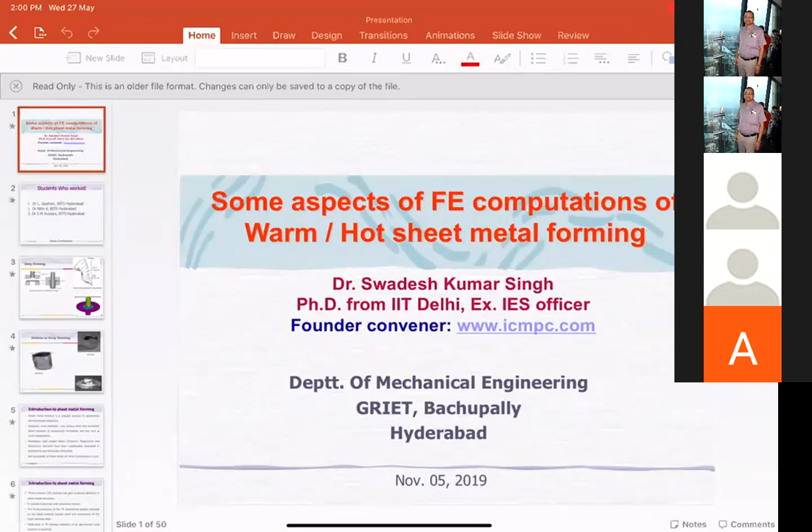Just a minute. So everybody is able to see the screen? Yes, sir. Yes, yes.

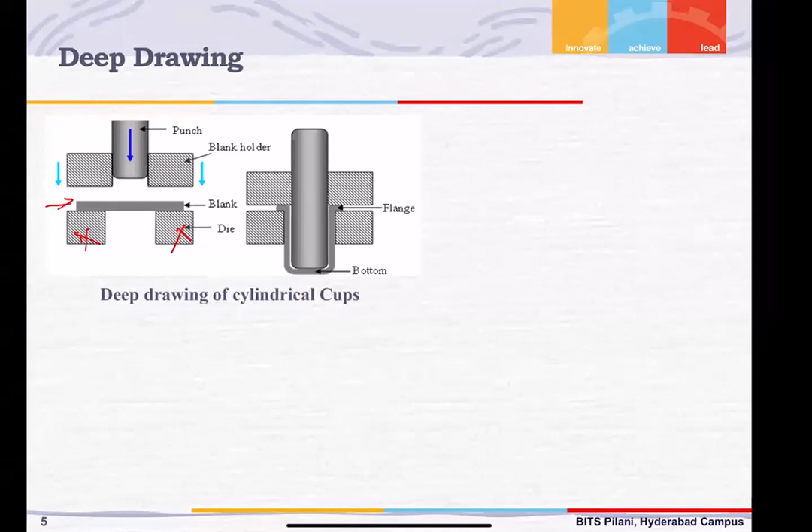So for deep drawing, here we can see the dies, and the sheet metal blank is kept over the die. We apply blank holding pressure. Why do we apply this blank holding pressure? Generally, this blank holding pressure is approximately 2% of the yield strength of the work material.

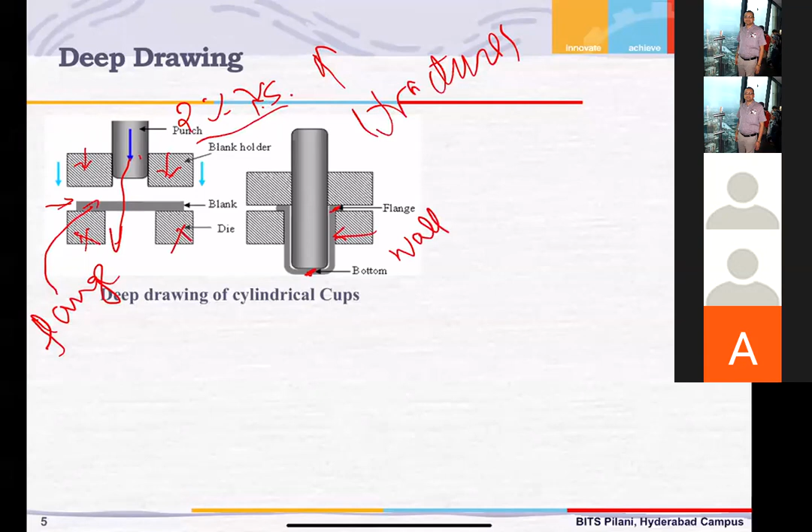So when the punch comes in, the sheet will come in the form of a cup. The technical term for this is cup bottom, this is the flange, and this particular part is called the cup wall. There are different regions in the deep drawn component.

Now if you see the cross section of the drawn cup, if you cut it, these are the stress patterns. This figure I have taken from Dieter, a very beautiful book. All teachers must study this book, Mechanical Metallurgy by G.E. Dieter, especially the metal forming part, metallurgy part, very beautiful book.

In the flange region, there are compressive hoop stresses and radial tensile stresses. In the wall region, there is uniaxial stretching. At the cup bottom, technically speaking, there is no significant stress pattern, but very insignificant biaxial tension will be there.

Most of the load the material experiences is in this region, the punch corner region. So because of excessive load, there will be a neck formed in that region.

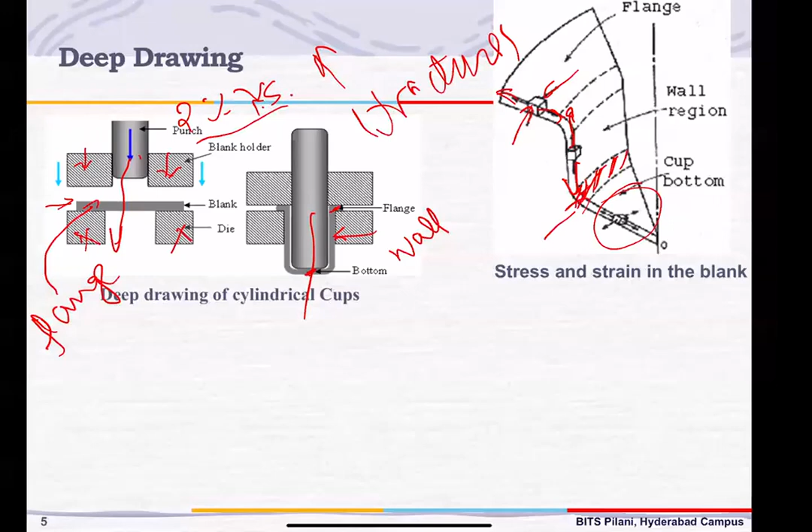So this is basically discretization using LS-DYNA. We have a lot of dedicated facilities at GRIET, very state-of-the-art machines, especially for metal forming. We have simulation software, we have a scanning electron microscope, so if you need any help please let us know.

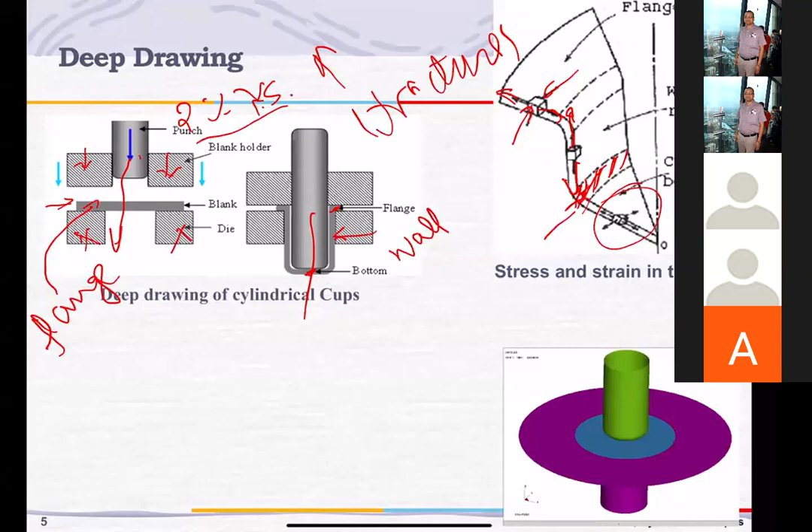So we have LS-DYNA, and we have 2 cores. What is the meaning of that? We use the preprocessor Dynaform, which is tailor-made for sheet metal forming operations. By giving boundary conditions, especially the characterization of material you have done, putting all the parameters into the preprocessor, then you run the program. When you run the program, there is a solver doing the calculation in the background.

So 2 cores means there are 2 licenses of LS-DYNA, so that computation time will be approximately one half. When you are doing actual computation, it will take days together.

In this presentation I will tell you that when you are artificially scaling up the deformation speed, the predicted values are not correct, I will show you here. So we should try to run the simulation in as exact conditions as possible, and for that you require multiple cores.

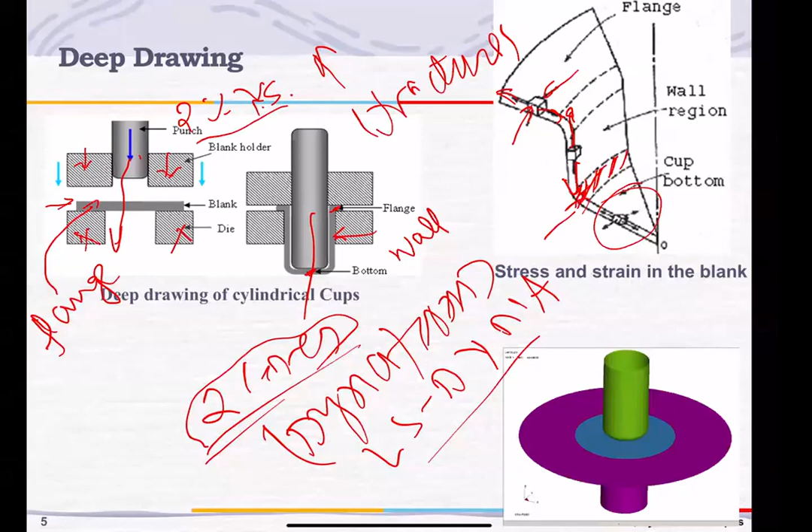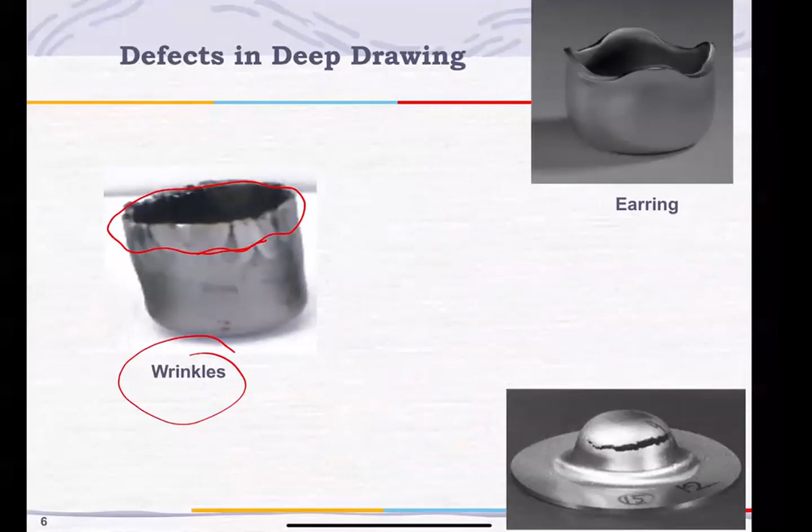See, these are some of the defects I was telling you about. These are wrinkles. These wrinkles will appear because the blank holding pressure is not sufficient.

Now, there is earring. Professor Mishra was also speaking about earring. The earring we cannot avoid because it appears due to the delta R value of anisotropy: R0 minus twice R45 plus R90, divided by 2, delta R. When there is a larger value of delta R, this ear height will be more.

Once again, for this July edition of FDP on material modeling, I would like to pull basically either Professor Yoon or Professor Barlat, because they are expert in this, especially Yoon, because there is a Yoon model for this particular earring height and earring prediction. So I will try to request them to give one presentation on this material model in July.

But there are schemes that you can minimize this earring height. Otherwise, after deep drawing, what we have to do? We have to cut off the ears and get the final product, and unnecessarily we are adding another process in between. So this can be minimized. And then...

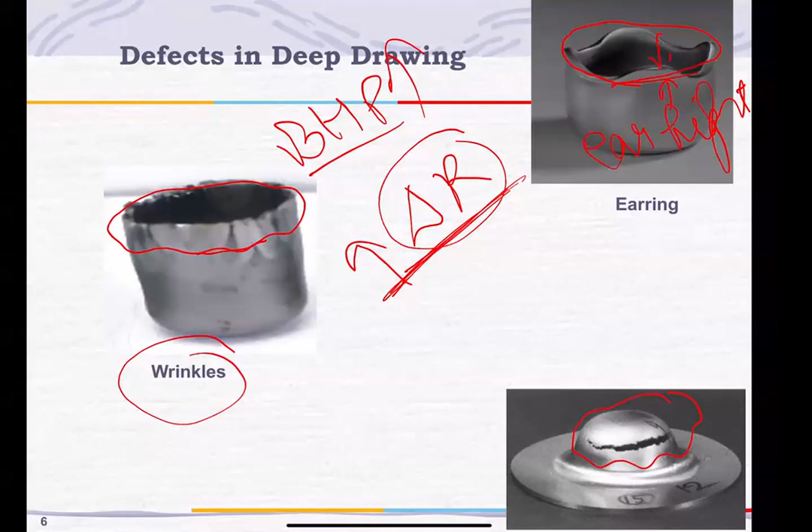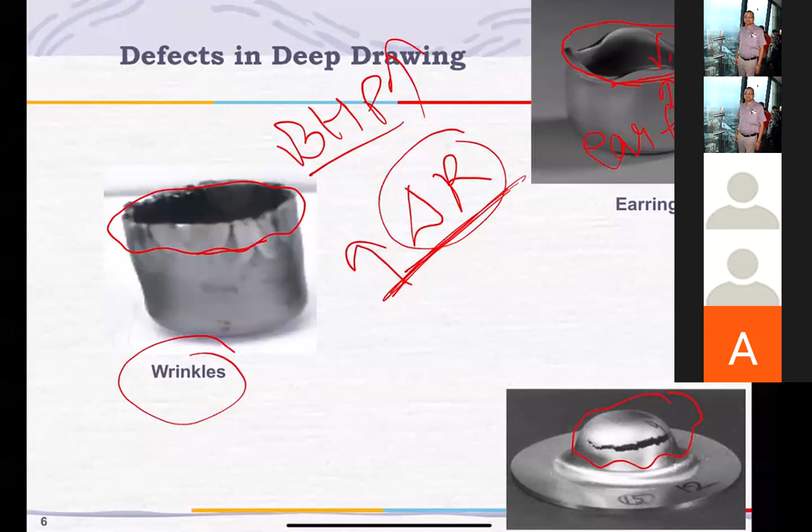Another very popular defect is fracture at the cup bottom. This appears when either the draw ratio exceeds the limiting draw ratio, or when the blank holding pressure is high. Because of these two reasons, fracture appears in the drawn component. Of course, there are other defects also, for example stretcher strains, orange peel, and 6-7 other defects, but we are discussing only the main defects.

So introduction, what is it? Basically, sheet metal forming is a popular process in automobile and aerospace industries. Whatever automobile product you see - somebody told me, those who are working in the automobile sector, that approximately 25 to 30% of the engine products are sheet metal formed products. So it's quite extensively used in not only automobile but nuclear industries, wherever there is a fuel bundle and all that, it's all sheet metal forming operation.

So some of the popularly used materials are low carbon steel, generally, for example for car bodies. If it's a low end car, the material is interstitial free steel or DQ steel. Austenitic stainless steel is also used extensively. But if it is a high-end car, sometimes we use titanium to make the car body light, sometimes in high-end cars. Also titanium and magnesium.

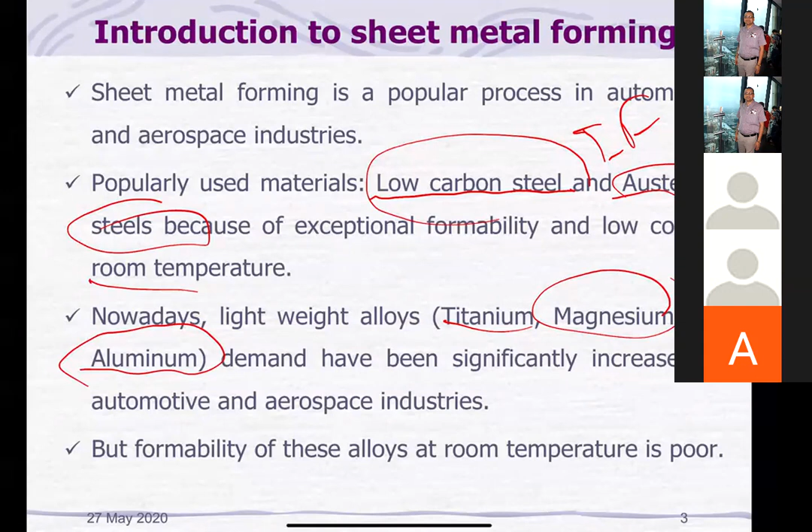Our friend Professor Manoj Gupta also spoke extensively, it was a very beautiful lecture by him. Aluminium - generally whenever it comes to aluminium, we use duralumin. But the problem with aluminium is it has got very poor formability. It is very difficult to form aluminium, even the duralumin. But this titanium also, we are going to discuss.

I'm going to discuss 2 case studies today. One is ASS, and another one is titanium. So there I'm going to discuss these things.

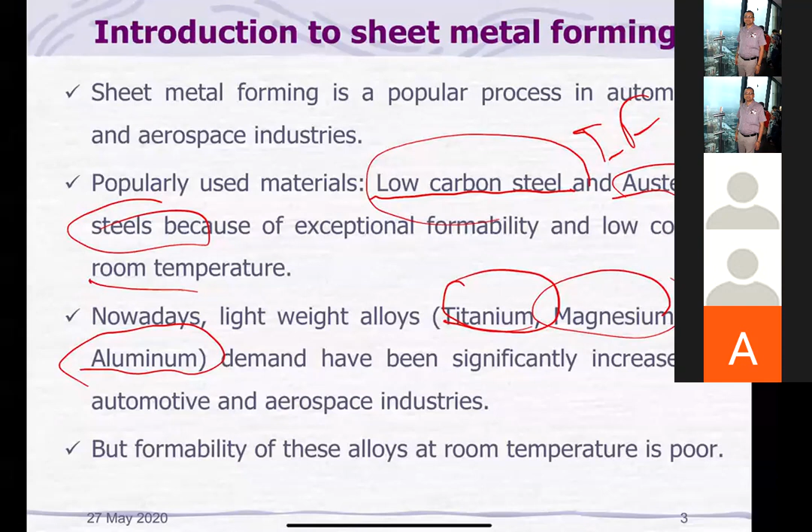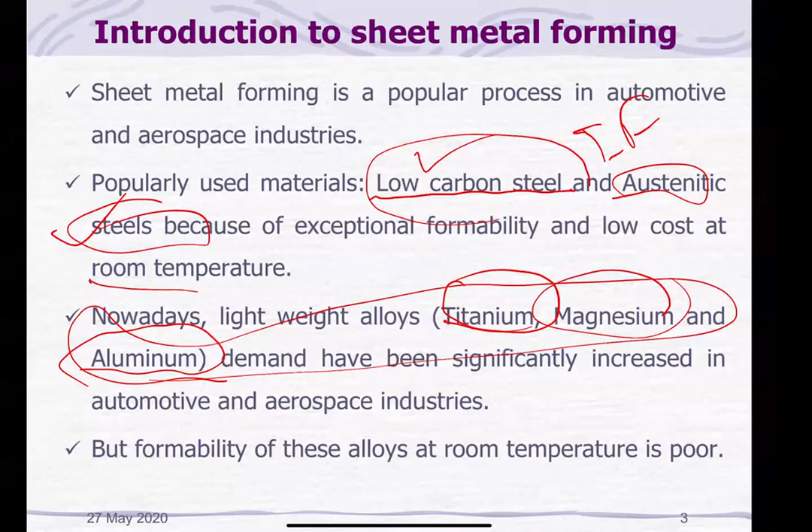So except low carbon steel, and up to some extent austenitic stainless steel, these materials have got very poor formability. All these materials like titanium, magnesium - as Professor Gupta was telling, there is a material AZ31, so it has got some good formability, but nothing close to low carbon steel and ASS. ASS is known to have very good formability.

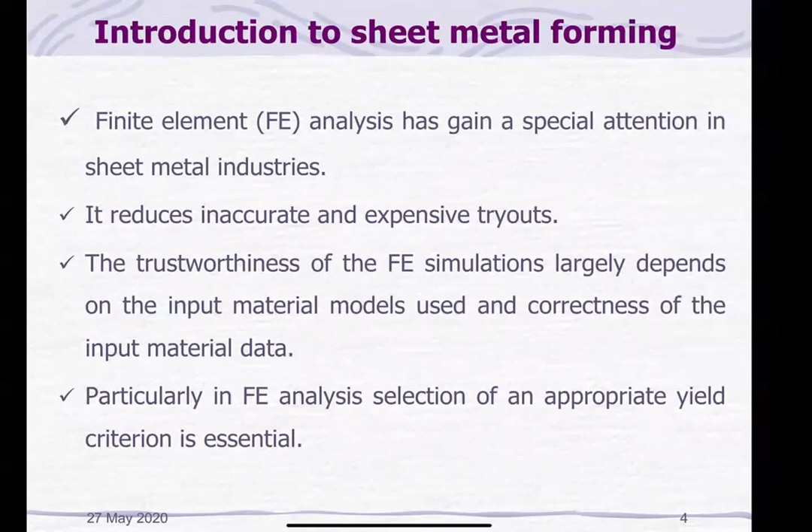Then the problem is whenever you think of any new component, new design, you have to form it. You cannot go for multiple hit and trials. Especially we have got titanium, already it is a very poorly formable material, so we cannot go for multiple hit and trials. So we have to depend upon finite element computations.

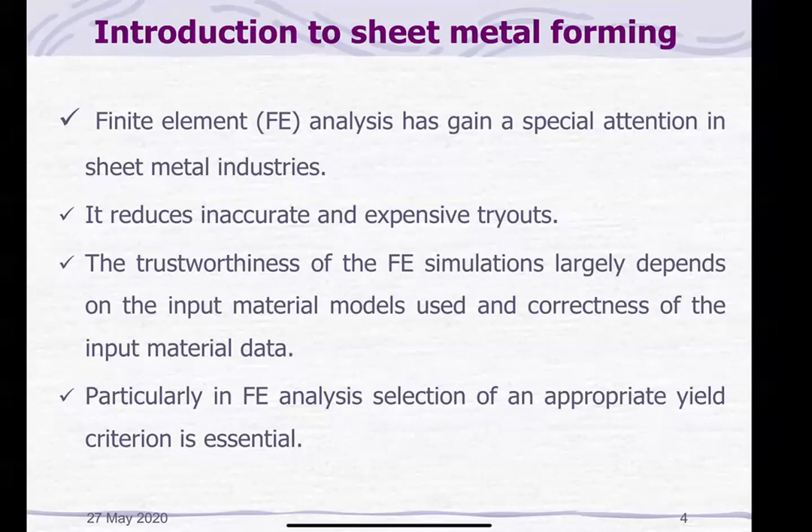And what I have listed are some of the advantages of finite element computation. I think all of us are teachers, so all of us know these things very well.

Then finite element simulations of warm forming involve highly nonlinear yielding and flow behavior. What is the problem? When you are forming the material at room temperature, the number of parameters in evaluating it are quite limited. For example, when you are thinking of room temperature, what are the parameters that you have to give to any simulation? Yield strength, and then...

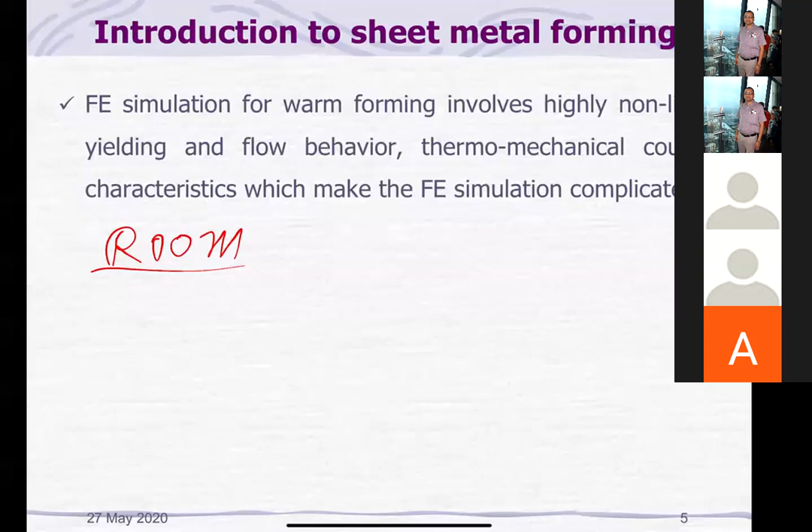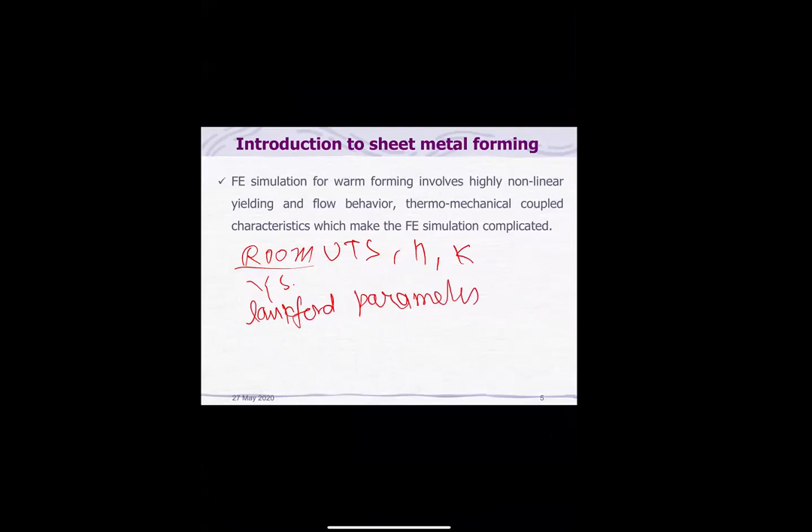Ultimate tensile strength, work hardening exponent and strength coefficient K, and then Langford parameters - R0, R45, R90. Actually, Nitin was also telling that for biaxial parameters are also used for simulation for some special materials. But these parameters are minimum. For example, either you follow Hill or Barlat. Barlat has 3 models - Barlat 2000, Yoshida Barlat - there are 3 models that people use nowadays. So these parameters we have to calculate.

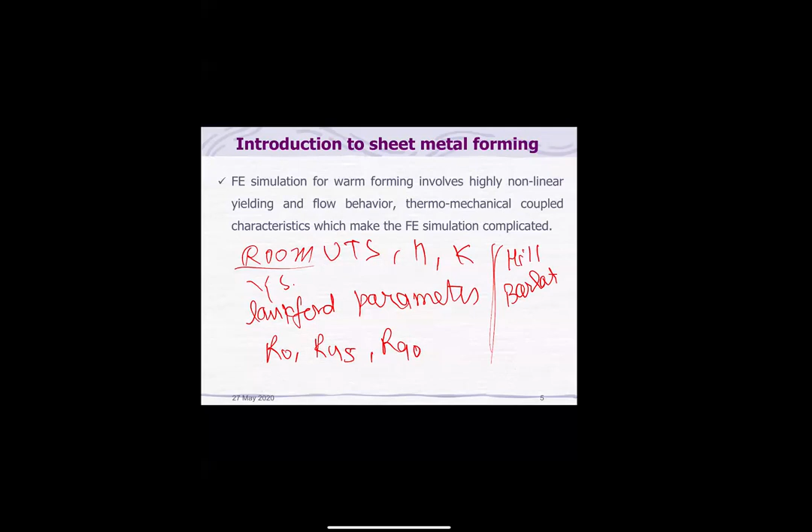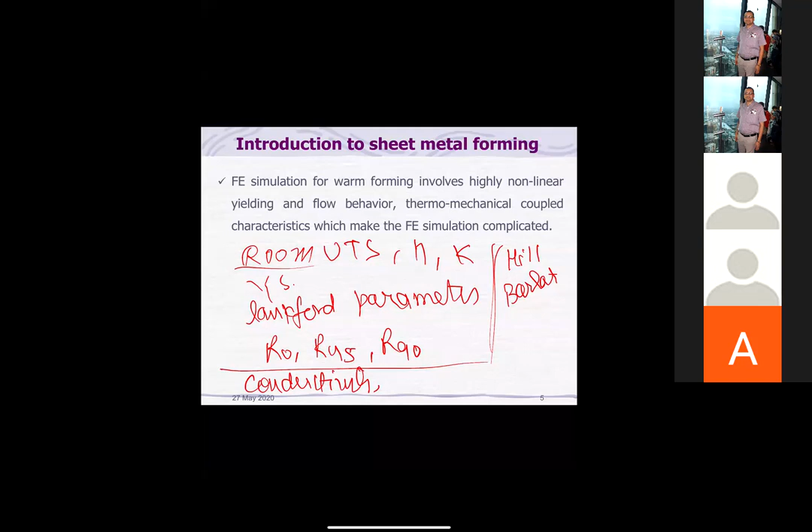But if it is warm forming, some additional parameters come into picture, for example conductivity of both the workpiece and the tooling, and the parameters that are required at high temperature. All these parameters have to be known. So certain discussions I will be doing related to that.

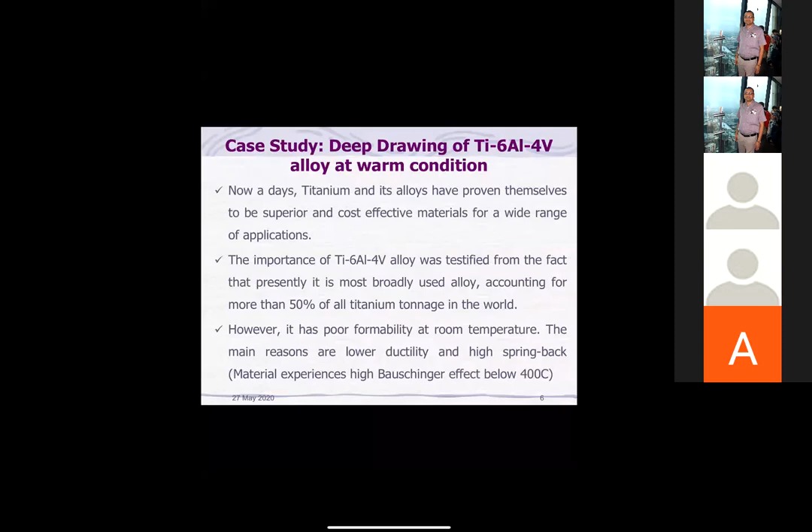So as I told you, there are 2 case studies I'm going to discuss. First is titanium grade 5 - titanium with 6% aluminum and 4% vanadium. This is also called grade 5 material.

Dr. Bhattacharya was telling us, in a very informative session, that this material is the most popular material in the titanium category.

One of the materials his team developed themselves is the beta 21 alloy. They developed this material for defense applications in India, and we are jointly working on a project with Dr. Amit Bhattacharya to test the formability of this beta 21 material.

We should know that titanium grade 5, 6Al4V, is a two-phase material, alpha and beta, one BCC and the other HCP. HCP is generally brittle in nature, while BCC is strong. As far as formability is concerned, the best crystal structure we look for is FCC, because FCC has the highest ductility. The reason is simple: it relates to the slip system.

So while preparing this material for all of you, I thought that if you see the presentation slides of Professor Sushil Mishra, Nitin, Dr. Amit Bhattacharya, and mine, you will get the overall picture of what is happening with formability.

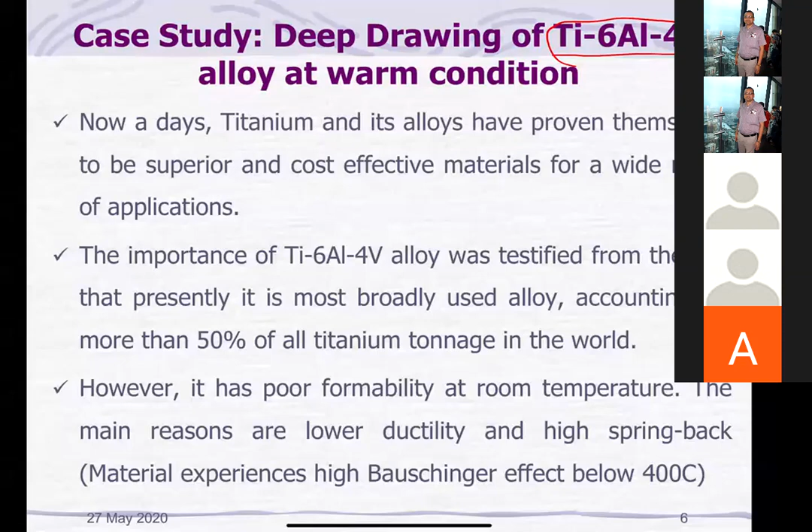Titanium is a very important material, with a lot of defense applications. Without titanium, it is impossible to do anything.

As I told you some time back, to study formability, not only experimentation but also simulation support is needed. And simulation will run properly only when the material properties are given to the system very properly.

As a side point, I'd like to tell you something personal. Most of you know we are organizers of this ICMPC conference, and the next conference will be at IIT Indore. Professor Khalsa and some people from NIT Bhopal, and friends from IIT Kharagpur, are the organizers. We receive close to 1,000 papers every year for this conference, and approximately 60% are accepted for presentation and publication.

What I've noticed is that most authors writing papers on modeling and finite element computation don't give any material properties—what properties they used in the system. They just give some colorful images with no discussion, just observation. Kindly don't do that.

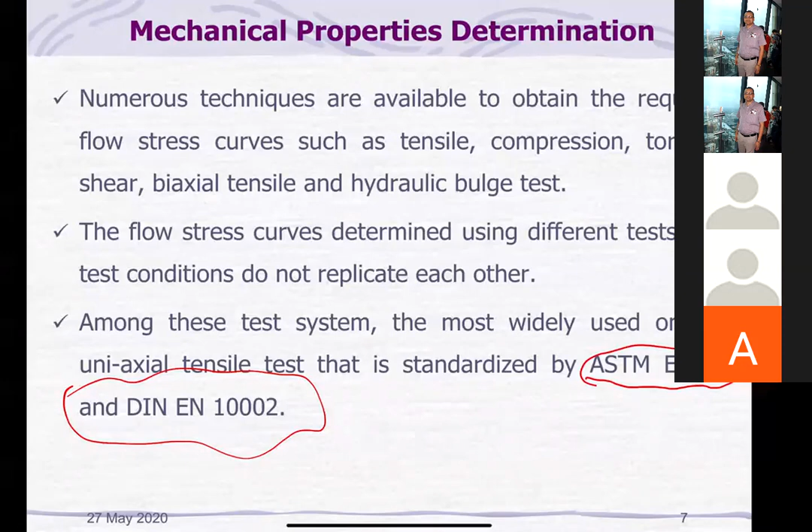How exactly do we calculate the properties? We have many systems, mostly through collaboration with BITS Pilani Hyderabad campus, with Dr. Nitin, Dr. Suresh, and Dr. Gupta. In our group we have a lot of machines.

Presently we have the capacity to perform tensile tests at constant crosshead speed and also at constant strain rate, ranging from 0.0001 per second to even 100 per second. This is the range in which our machine can operate, capable of tests at both constant crosshead speed and constant strain rate.

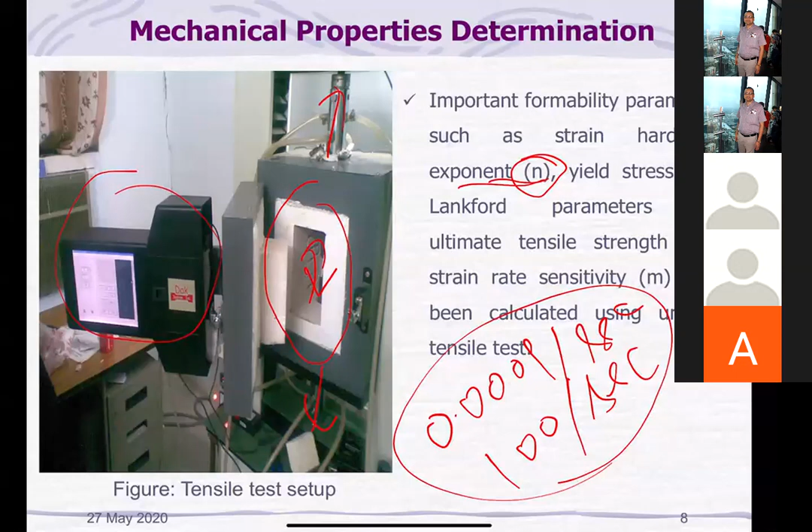So all mechanical properties have to be calculated, especially N, which is very important for studying forming behavior. It plays a crucial role, since there's an objective question that appears in various competitive examinations: the formability of the material depends upon...

It's quite a confusing question.

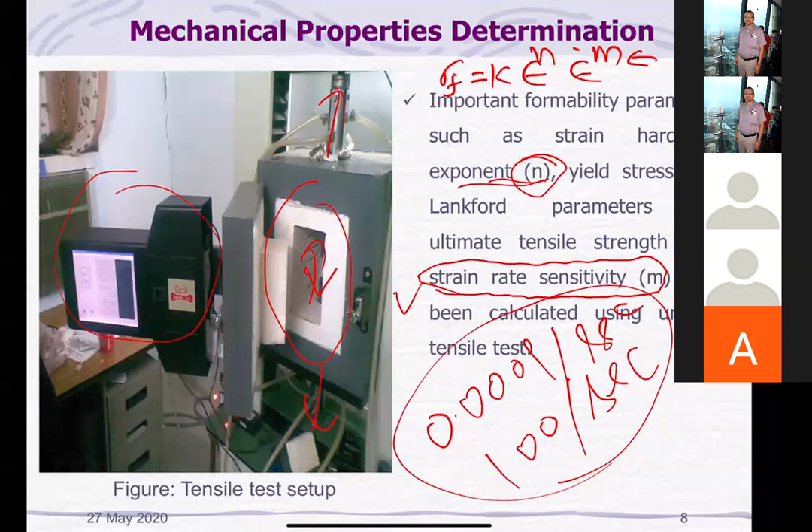Of course, formability depends upon many factors, but the most important factor is the work hardening exponent N, because it will suppress the formation of neck in the punch corner region. And because you are forming at elevated temperature, strain rate sensitivity index M also plays a very important role. If you see the complete flow curve equation in its basic form, it is sigma F equals K epsilon raised to power N, epsilon dot raised to power M. We are talking about this M, sensitivity index. So these things are very, very important.

This is the BISS system we are talking about. This facility is there at GRIT. This system is meant not only for testing the formability of the material, but also to carry out the tensile test. There is a chiller here, and a controller connected to a computer. Inside the furnace, we are keeping the specimen. This facility can go up to 900 degrees centigrade.

So certain things we should understand. For research work, anything and everything cannot be used. For example, most of our private colleges have a quite cheap UTM, not even 2-3 lakh rupees, you will get that UTM machine. A result from that UTM cannot be considered as an input to any research paper. You know why? The machine should be quite accurate.

There are three types of errors in a machine. First is basically the system error. What is system error? Because two products cannot match, it is not possible to duplicate any product exactly, so there will be some variability. We should not worry about the system error, because by calibration the system error can be eliminated. These system errors are also called systematic errors, and they can be eliminated.

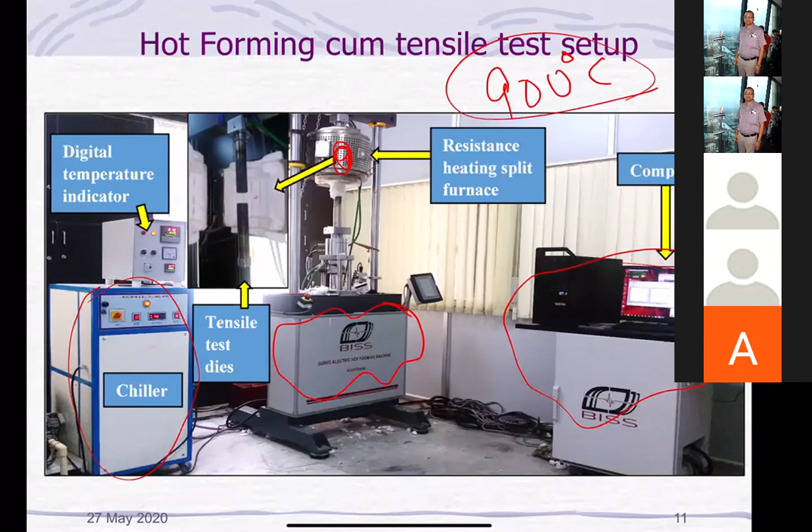But there is another type of error called short period error. This short period error is due to change in the environmental conditions of the machine. For example, suddenly there is a vibration in the machine for a brief period, or a sudden increase in temperature or in the load cell. These errors we cannot avoid. So only machines in which these short period errors are minimized can be considered for any research work.

This BISS system is an Indian system. It's something like Bangalore Instrument, something like that. It's an Indian system, but owned by ITW, same as the Instron people. It's owned by them, but the owner here, the Indian counterpart, is basically Indian, and the company is basically Indian. Most of the workers are Indian, so they are quite accurate. They are competing almost with Instron and Zwick.

DMRL also has got a very big facility, I think close to 1.2 crore, a bigger facility. We have only the 5-ton capacity. I think DMRL people, actually Dr. Raghu, he's someone we respect very much because he also helped us a lot during our initial days of research. They have got, I think, a 1.5 crore BISS system. I think they can go up to 50 ton, and temperature also they can go up to 1200 degrees centigrade. But here we can go only up to 900 degrees centigrade.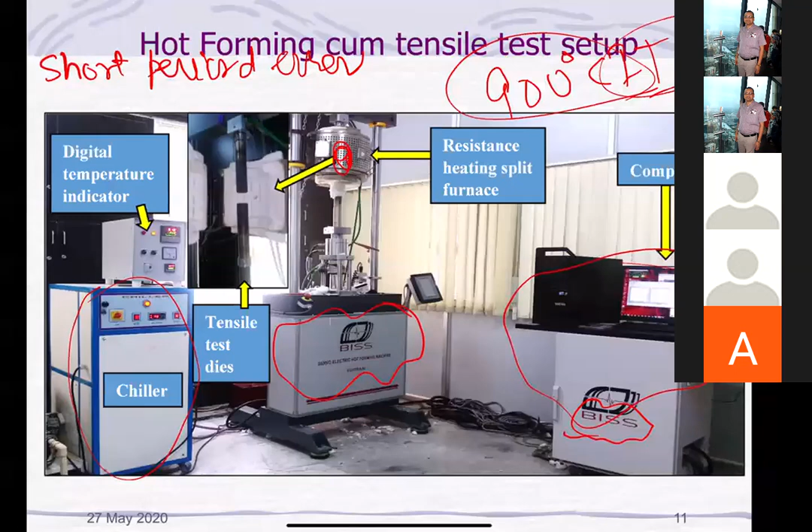Then we are discussing about the titanium. So at 400 degrees centigrade, these are the properties. R value, this is called R0. This is called R45, and this is called R90. We can see here that there is a lot of variability in the material.

See, even the yield strength at 0 degree orientation to the rolling direction - there is almost a difference of 100 MPa at the 45 degree direction. And again back to the square one at 90 degree. So there is huge variability in the yield strength and ultimate tensile strength. We can see this through the Lankford parameters R0, R45, and R90. But in the N value, there is not much significant variation.

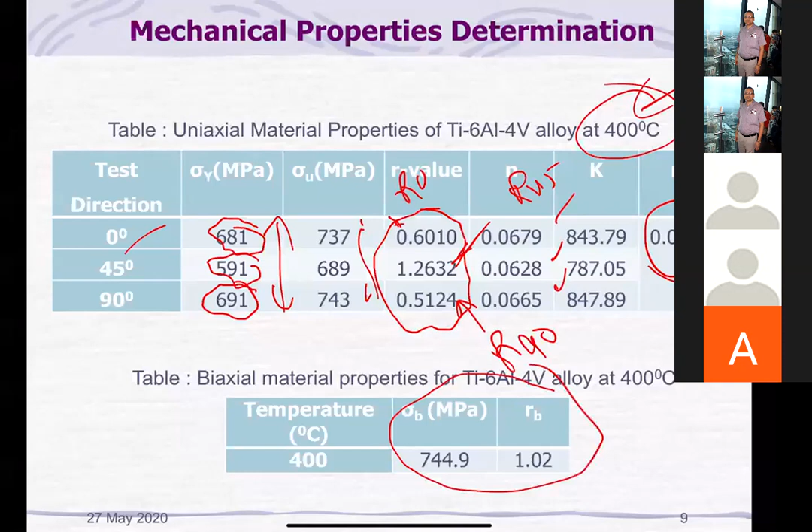M value is also very small, because the temperature is only 400 degrees centigrade. As Dr. Amit Bhattacharya was saying, below 600 degrees centigrade, no microstructural changes are expected in this material. Oxide formation, alpha-beta converting into beta, these changes are not expected below. Even phase changes are not possible below 745 or 800 degrees centigrade. I don't know the exact metallurgy of this titanium; only Dr. Amit knows it very well. And these are basically biaxial parameters for titanium at 400 degrees centigrade.

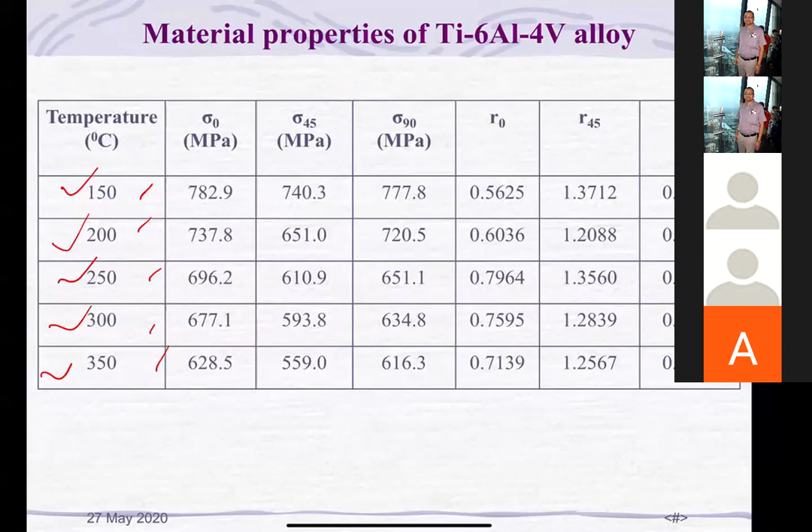To characterize the material fully, we have taken so many temperatures: 150, 200, 250, 300, 350, because students working under us, initially we ask them to fit into some ANN or support vector regression just for initial hands-on, so that they know how the material properties vary with respect to temperature. It's a basic study we ask students to perform, and for these studies we need data. For that we carry out tests at different temperatures, and generally they publish this ANN type of thing in a low impact factor journal. Our main study goes to some good SCI journal, but initially we encourage students to write on their own, and whatever basic study they carry out, they should publish at least in some Scopus journal, because a non-Scopus journal is not worth publishing.

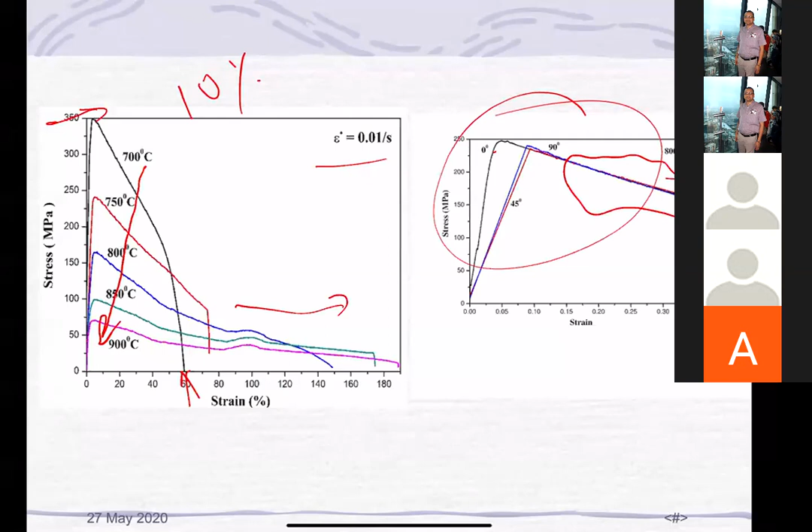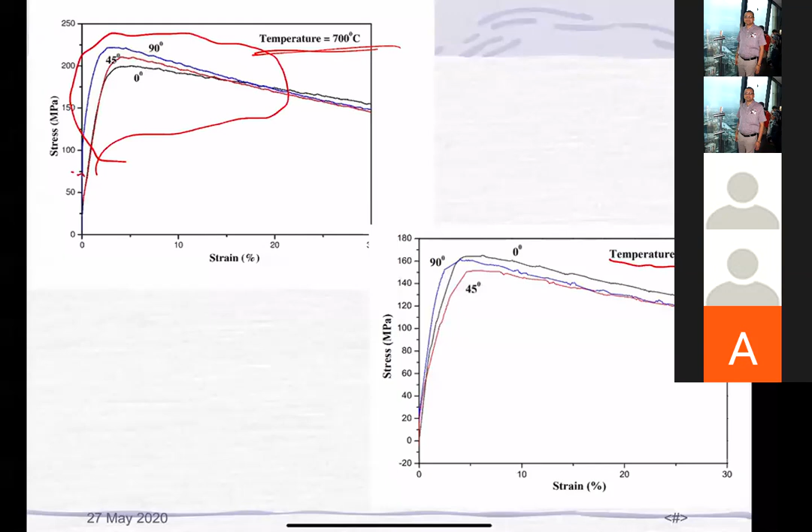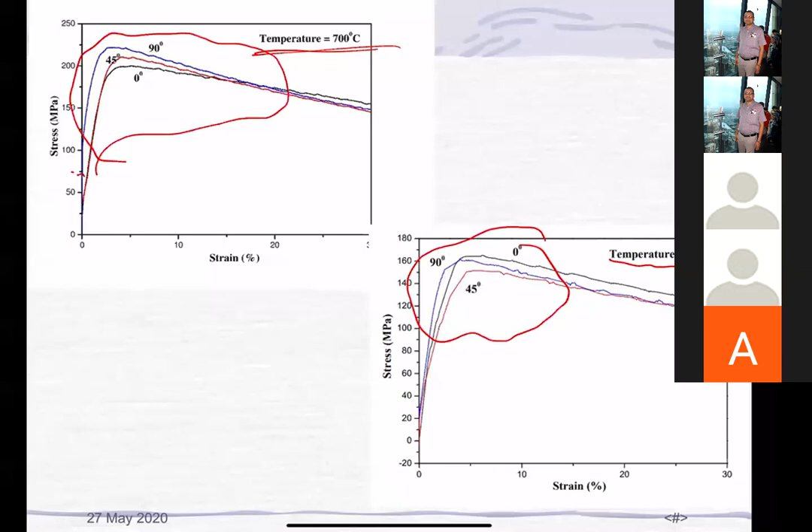Initially I planned some video, but there is no video here. I will try to explain something. Whatever study you are performing, these studies are highly material specific.

For titanium, we have seen how the stress strain diagram follows. If you see at room temperature, and if the temperature increases further, let us say 300 degrees centigrade, the curve will shift like this. But this philosophy we cannot extend to every material. Each and every material has to be investigated thoroughly before doing any research on that.

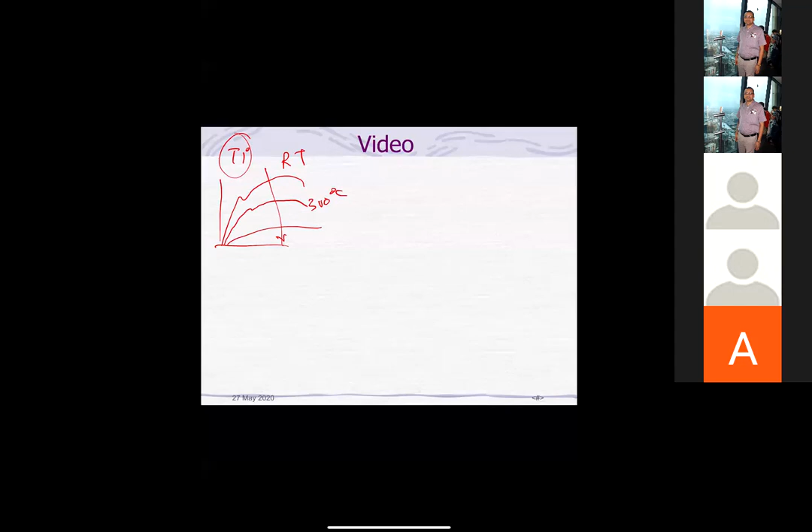For example, austenitic stainless steel, ASS, this is another material I'm going to discuss today. If you see ASS, same stress strain diagram, let us say this is the stress strain diagram at room temperature. Now you increase the temperature to 300 degrees centigrade. We are discussing this for ASS.

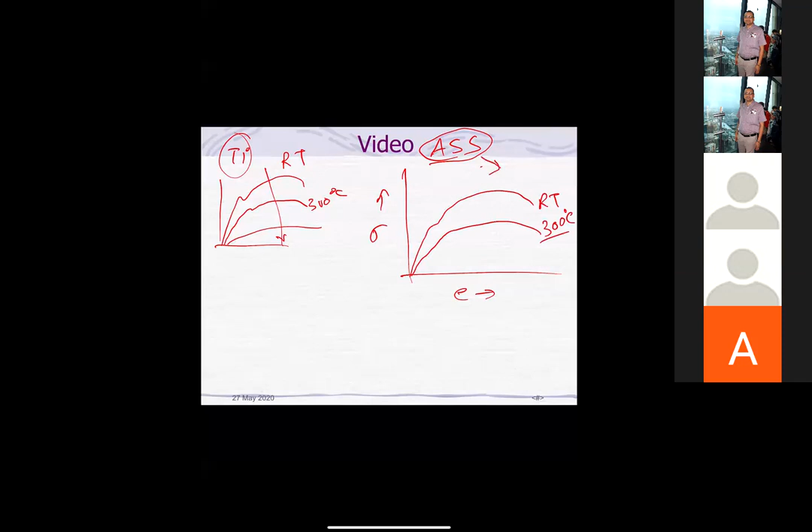But now what happens, due to the presence of chromium, there is a phenomenon called dynamic strain aging, also called the Portevin-Le Chatelier region. In a certain temperature range, the dislocation density of the material increases suddenly. This temperature range depends on the exact composition in the alloy, and it varies from 300 to 650 degrees centigrade. So in this range, what exactly happens, let us say at 450 degrees centigrade.

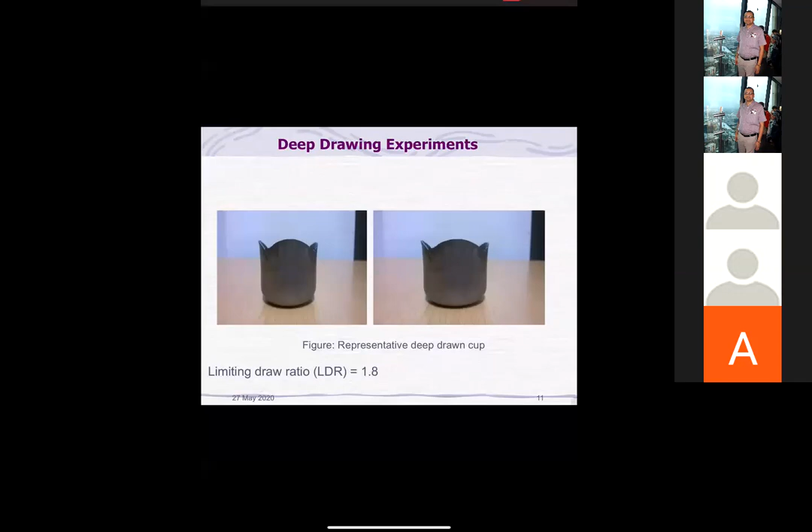If you see what happens inside the material, at a certain temperature, mobility of chromium becomes more than the mobility of dislocation. So the dislocation is moving very peacefully, chromium comes from the back and bangs it, and this divides the dislocation into many parts. Suddenly there will be an increase in the dislocation density. So what will happen? This temperature curve will be even beyond the room temperature curve. But when we go beyond 650, again the curve will go down. Let us say, this is the 900 degree curve.

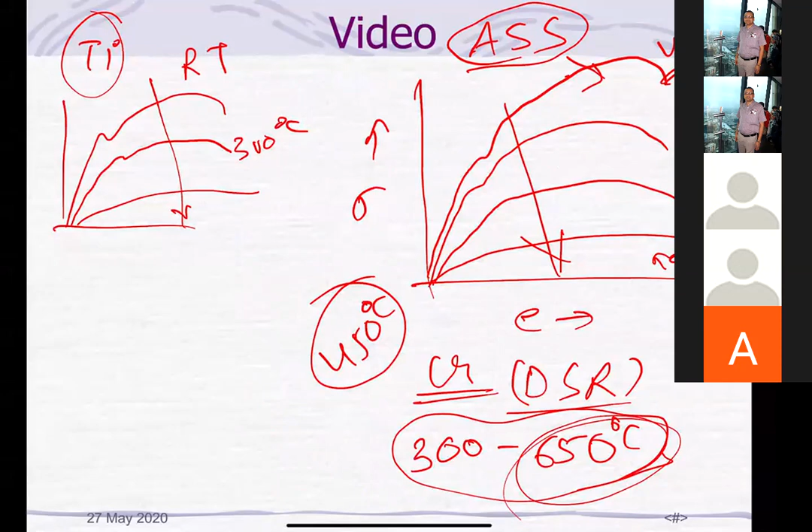So the idea being explained here is all the material looks similar. For example, researchers sometimes ask if they can take data from the literature, even though apparently the composition looks the same. But microscopically, the composition will not be same, there will be some variation. So we should do the characterization separately, because a slight change in composition will affect the properties altogether.

Now see, these are induction coils to heat the die, because the problem is that even when you heat the workpiece, if you keep it on the cold die, it will again experience thermal shock. So that should not happen. The workpiece we keep here, and the punch deforms the material, and the deep drawn component comes out from this side. This is another induction furnace, where we keep the work, heat it, and shift it over the die.

Dies are already hot, and we measure the temperature using a pyrometer. Nowadays pyrometers are quite popular for checking temperature. During this coronavirus time, everywhere they are using thermal scanning, meaning they are measuring temperature. We have so many such temperature measuring systems to measure the temperature of these workpieces in the die.

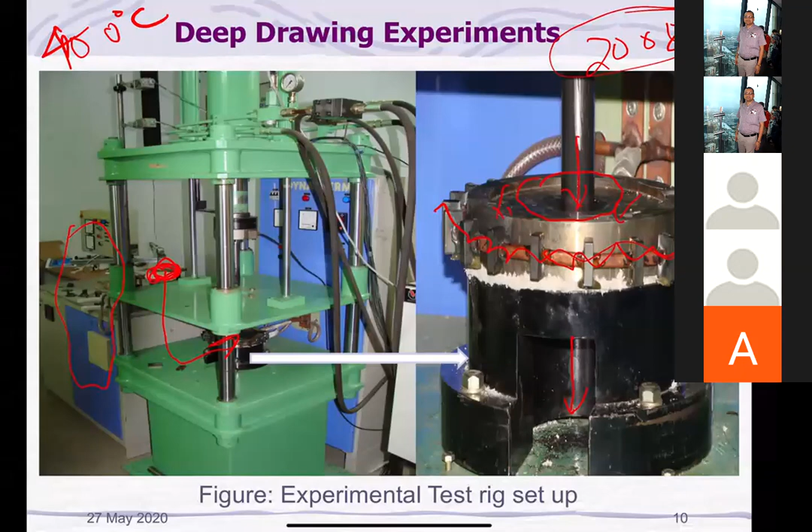So this is the setup we are using. These are some of the drawn components. If you see carefully, the ear height is quite high. It is primarily because the delta R value for this titanium is quite high.

Titanium has another problem. At room temperature, the HCP structure is quite predominant, so at room temperature the material is almost a brittle material.

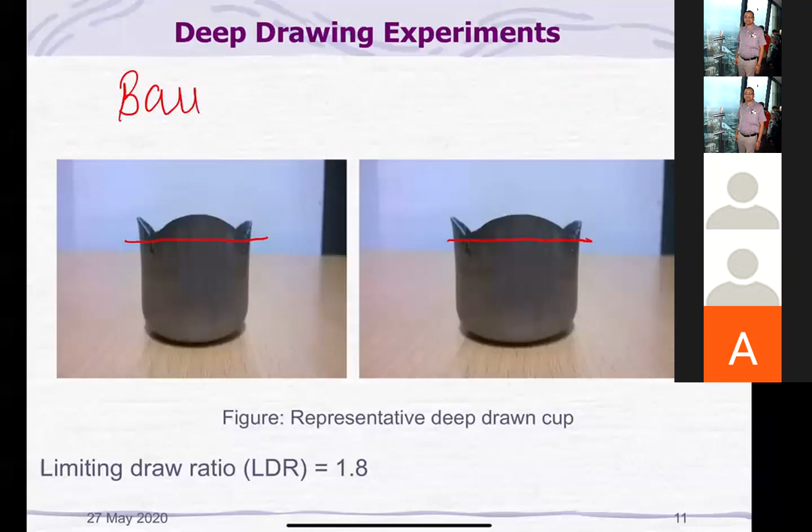But up to 400 degrees centigrade, titanium exhibits a very strong Bauschinger effect. Some of you may already know about this Bauschinger effect. Let me briefly explain it here.

Once again, the stress strain diagram. This is tension. Suppose you have loaded the specimen up to the work hardening region. When we unload it and load in compression, the yield point in compression will appear prematurely. There is a whole science behind it, dislocation theory, and I'm not going to get into it. This phenomenon is very strong in titanium below 400 degrees centigrade.

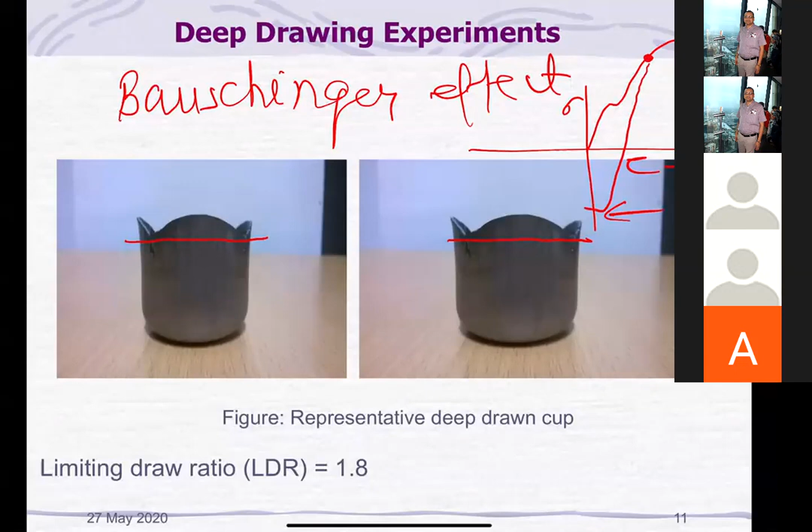So due to that, what happens? The fracture appears in this region. Of course, there will be a fracture at the punch corner radius. This is the initiation of fracture, and this is the final fracture. But due to the strong Bauschinger effect, fracture also appears in the wall.

The reason is very simple. The wall experiences what was flange material now coming in the form of wall. Initially it was flange, and then it is drawn into wall. The flange has radial tension and compressive hoop stress. So that particular material is already loaded in tension, so it will weaken in compression. When there is a compressive hoop stress, the material fractures. This type of fracture is unique to titanium, because of its very strong Bauschinger effect.

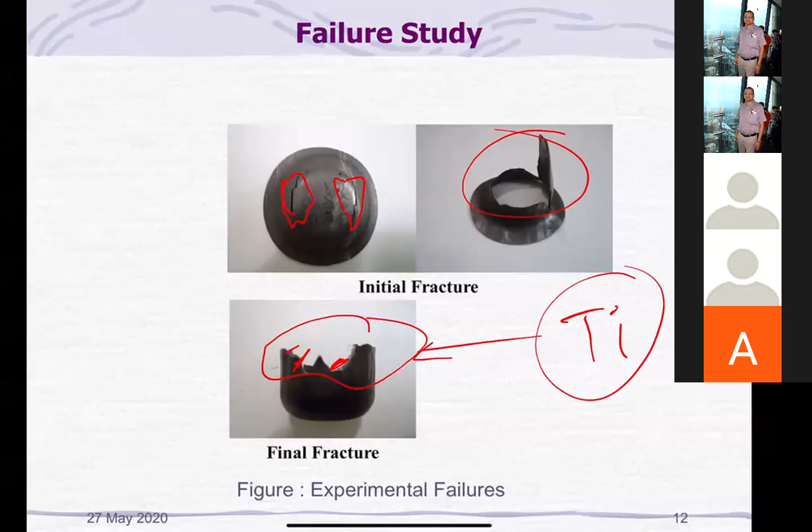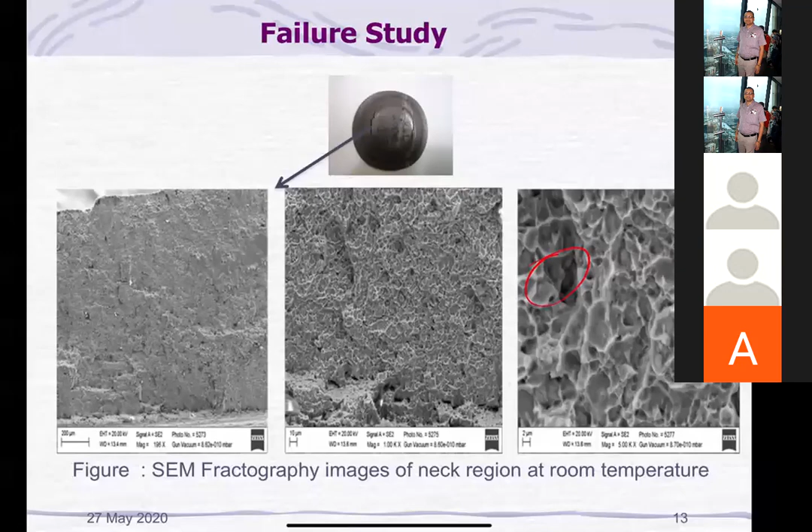So we have also done failure studies. At room temperature, we can say it shows a ductile fracture because there are dimples and all that, but somewhat you can call it a brittle neck region. At 400 degrees centigrade, the characterization is somewhat more ductile.

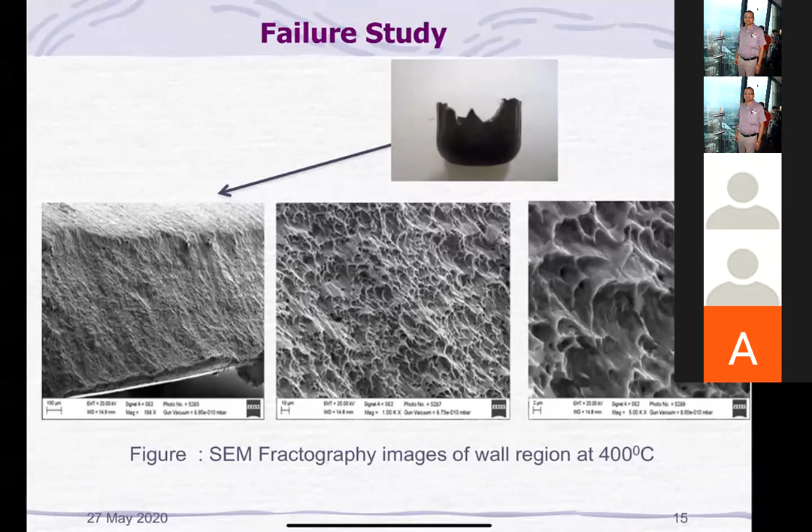It's basically fractography, so I will be speaking only on titanium. I will not be covering the EDS study now, because I want to finish at a certain time and keep some time for questions and answers. So when we meet for the second FDP in the first week of July, I will speak in detail, since I'll have a full 1.5 hours. I will plan that in one or two days and let you know. So presently I will be speaking only on titanium.

So we have prepared finite element models in Dynaform, using version 5.9.3. Presently even the sixth version has come, because we have an AMC, so we get updates in our Dynaform. Currently it's the 6.0 version, and we have 2 cores.

Only 1/4 of the geometry is discretized to save simulation time. This is very critical: coefficient of friction, because it is very difficult to measure the coefficient of friction, and without an exact value, predictions will not be accurate.

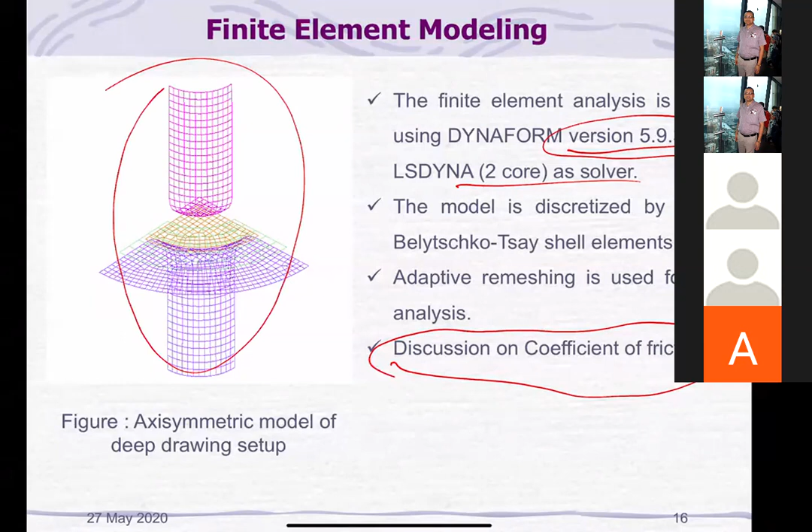There was one student of mine in 2010, because I've been working on warm forming since 2007 onwards. My doctorate topic was basically hydroforming. So from 2010 to 2012, there was one student who calculated these parameters. How she calculated, I will tell you.

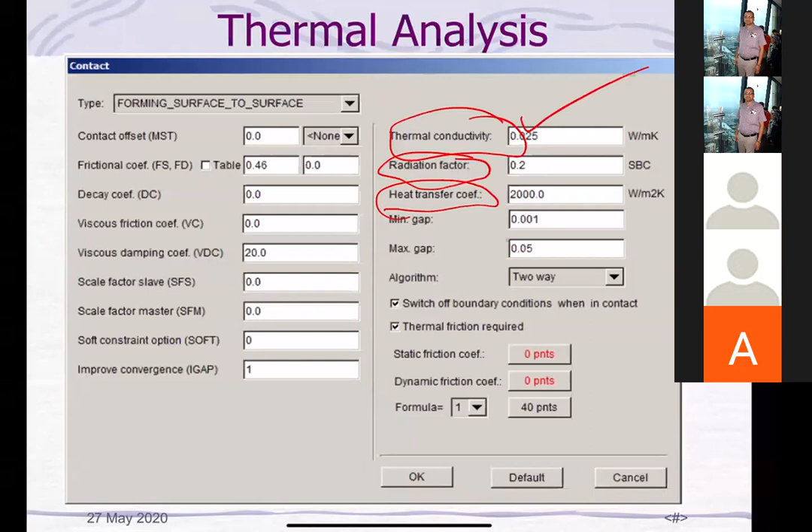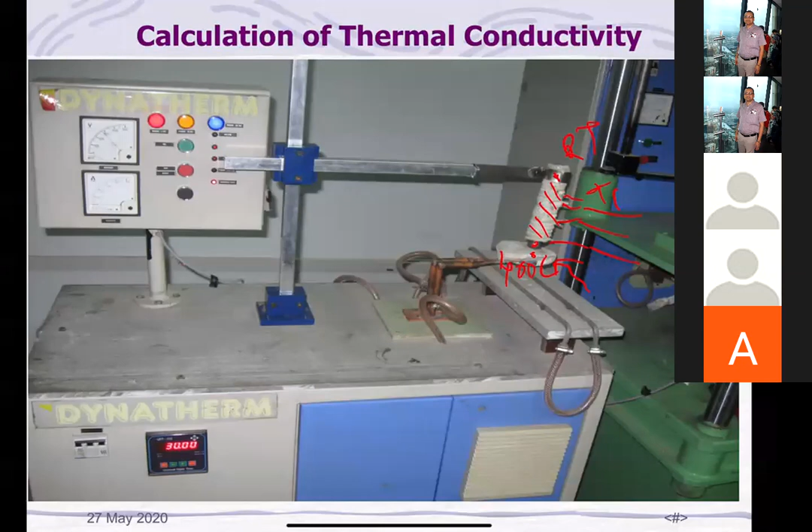So we have got these values for our dies, and if you want to calculate, you have to go by the same procedure, because to run the simulation, almost correct values should be fed to the system, otherwise it is not going to predict anything. So thermal parameters are calculated and fed to the system.

Now next, come to friction. In metal forming, whatever type you are looking at, whether it's extrusion, drawing, stretching, deep drawing, or bending, coefficient of friction is very, very important.

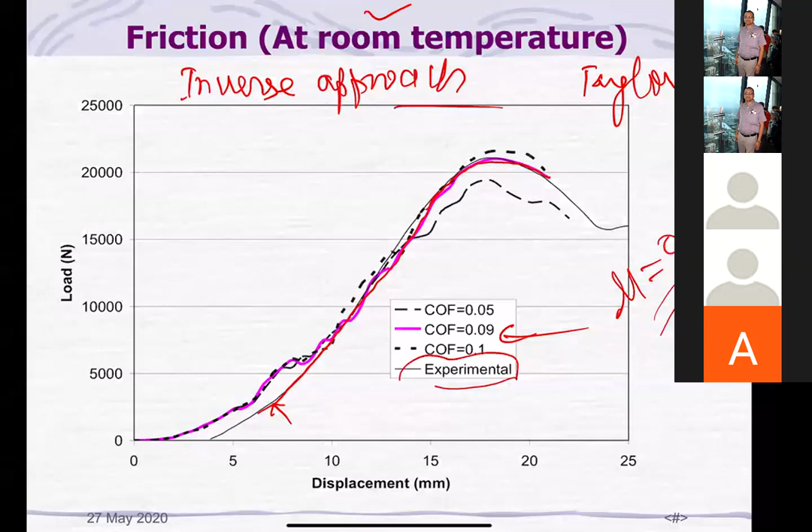But remember, at high temperature we have used Molykote lubricant between the work and the die, because at high temperature the coefficient of friction is going to increase. So the only way we can decrease it is by using a proper lubricant.

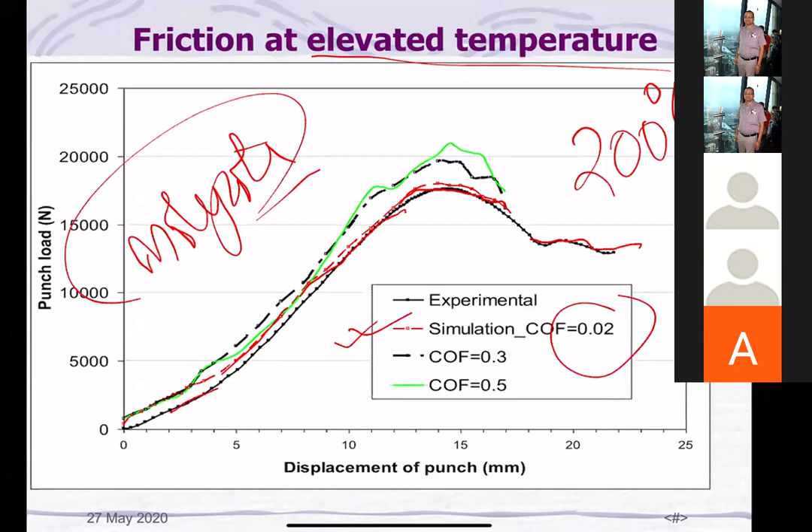So generally what people do all over the world is scale up the deformation speed, let's say by 1,000 times, and give the simulation result. Of course, if you don't have computation capacity, you can do it, but results are not going to be exact. So how to decrease the further computation time?

Discretize 1/4 geometry, increase the number of solver cores, but still, for a simple deep drawing case with close to 5,000 elements in the work, it will take close to 7 or 8 hours for 50 millimeter punch displacement, because that's the time we are getting here. So the conclusion is that we should not artificially scale up the deformation speed.

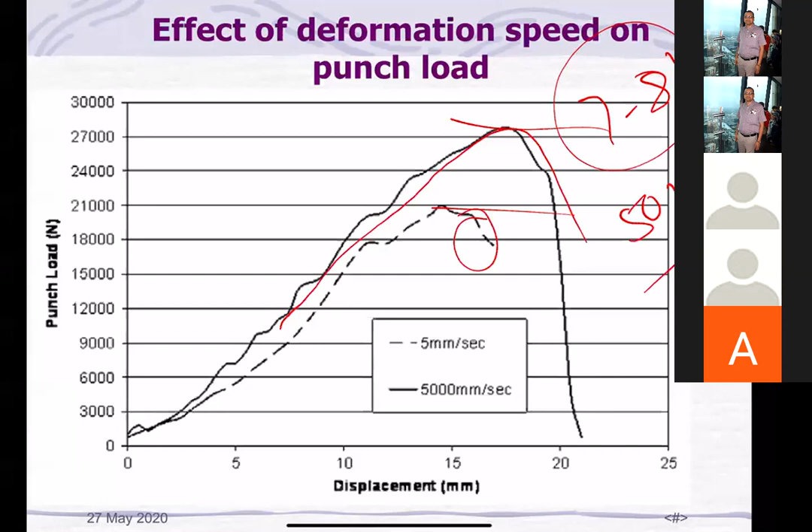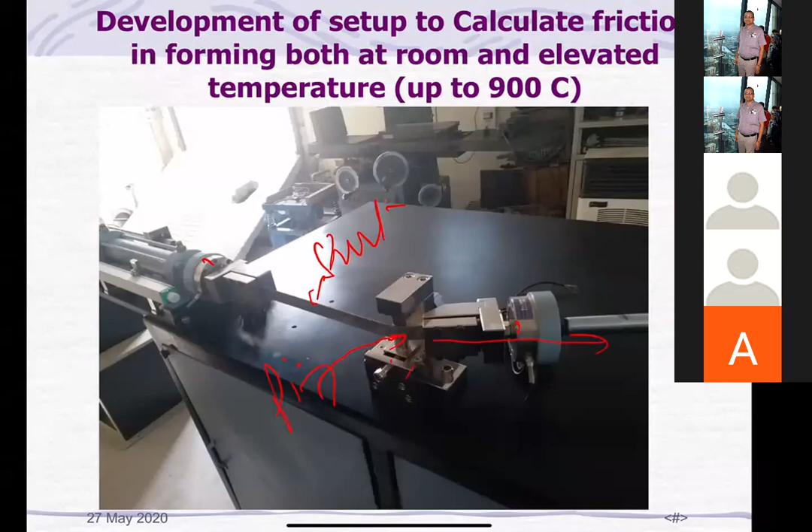Okay, now? We have some program here, because it took almost 1.5 years for us to develop this facility at our GRIT lab, at high temperature. This is the furnace, and this is the induction heater setup for this furnace. Induction furnace, we are heating the sheet. Heating is so fast that within 1 second, you will get the temperature up to 1,000.

This particular facility is in working condition, but at present we can calculate coefficient of friction only above 700 degrees centigrade, up to maybe 900 degrees centigrade. Less than 700 degrees centigrade, we don't have the sensor, because our fabricator said due to the lockdown that started in February in China, we are not able to get our sensor. Once this COVID situation subsides, we will be able to test less than 700 degrees centigrade.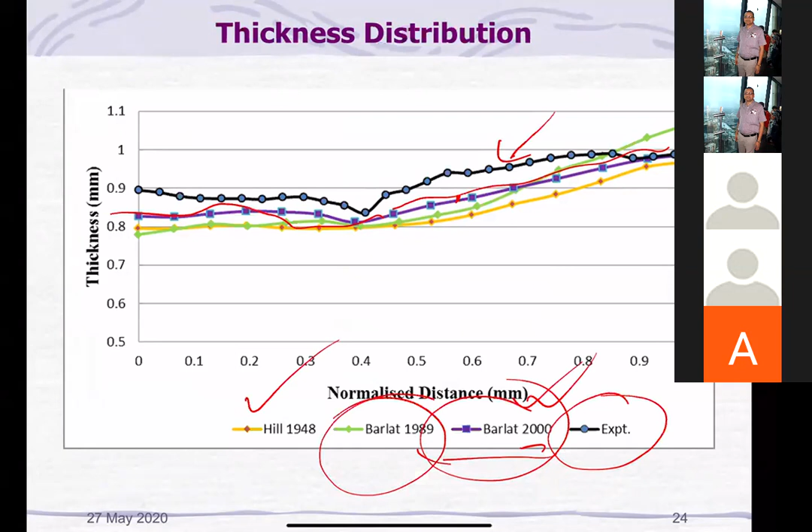And then... just 5 minutes, I will be 5 minutes. I will give a lecture, okay? Just a minute.

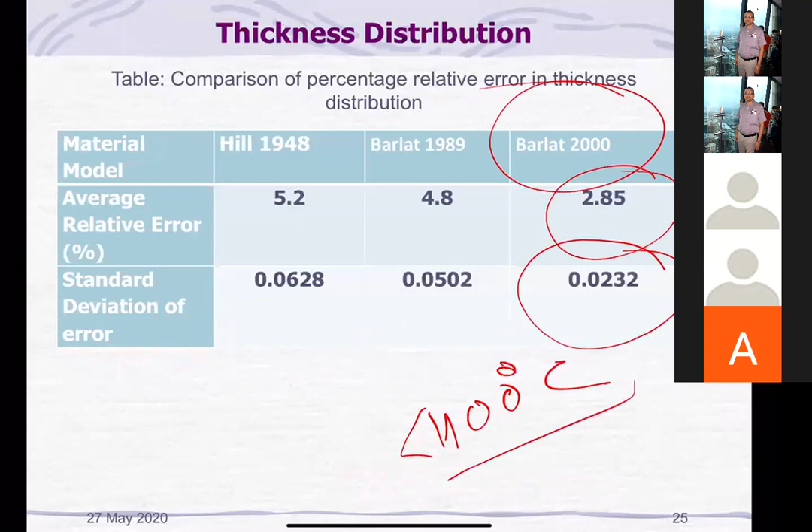There's a comparison between Hill, Barlat 89 and Barlat 2000. The average relative error is 2.85 and standard deviation is 0.02, very, very small. So for titanium grade 5, less than 400 degrees centigrade, we can use the Barlat 2000 model for prediction. These are some of the simulated curves for Hill 48, Barlat 89 and Barlat 2000, and this fits basically best.

So I will not be covering the case study on 316. I will stop my lecture here because Professor Rupinder will also be coming, and I want to keep some time for the question answers. So give me 2 minutes, Dr. Tanya, give me 2 minutes - I will switch off this system and come to another system.

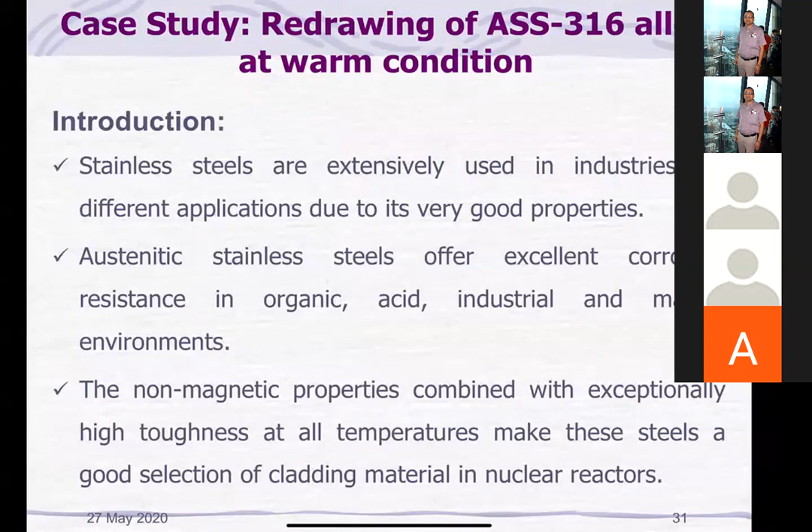Shashank sir? Hello. Shashank sir, are you there? Yeah, okay. Yeah, I'm on my regular system now.